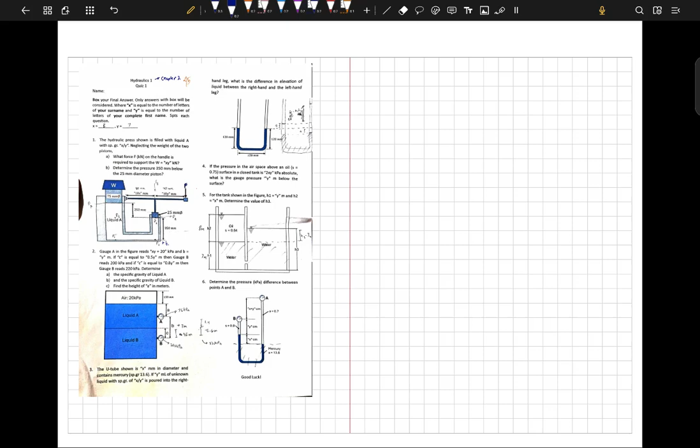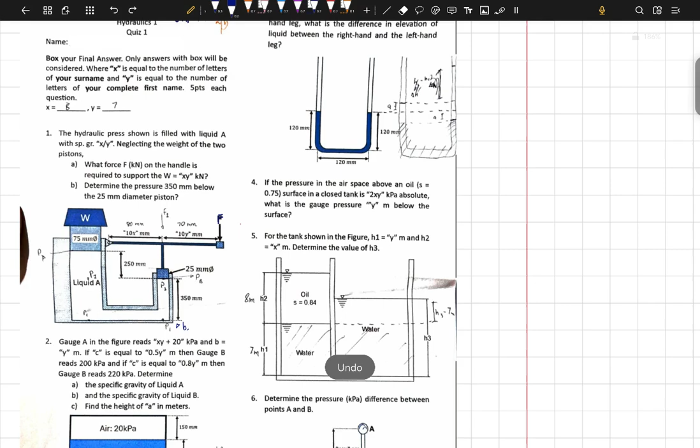Number 1. The hydraulic press shown is filled with liquid A with specific gravity of 8/7, neglecting the weight of the two pistons. What force F in kilonewtons on the handle? Ito yun, tinatanong.

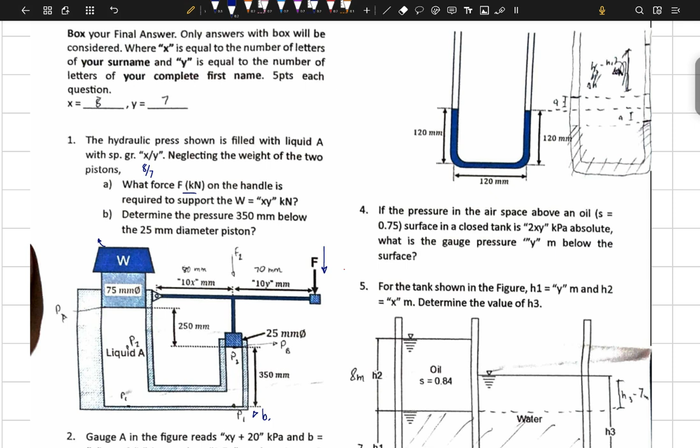Ano daw yung force na kailangan dito para ma-handle yung support na ito, which is xy kilonewton. In my case, 8 times 7, 56 kilonewtons.

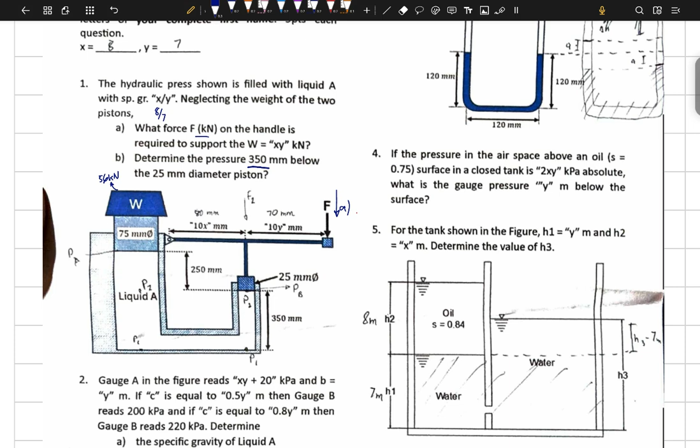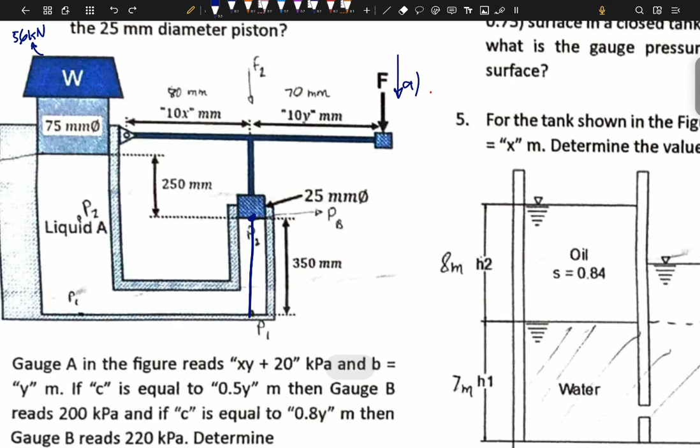Number 2, ito yung letter A. Letter B, ang hinahanap is pressure 350 mm below the 25 mm diameter piston. So ito yung 25 mm diameter piston, 350 mm below, which is ito na. So ano yung pressure dito? Sabihin natin P1. So sabihin natin F1 to.

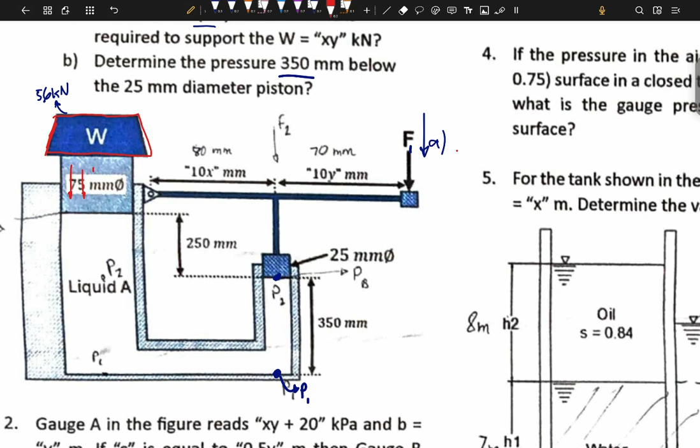So yung problem na to, analyze natin kung paano siya nag-work. Meron tayo ditong weight na tutulak dun sa tubig. Magkukos siya ng pressure, isa na yun. Yun na yung unang pressure na magkukos. And then meron pa tayo ditong liquid which is at this shape.

So ang rule sa liquid is pababa ng pababa, pataas ng pataas yung pressure. Ibig sabihin, mayroon din tayo dito na pressure difference, which is pwede na natin to i-cut like this. So same yung pressure dito sa line na to. So kapag kina natin yung sabihin natin P2 dito, ito na rin yung P2 na to.

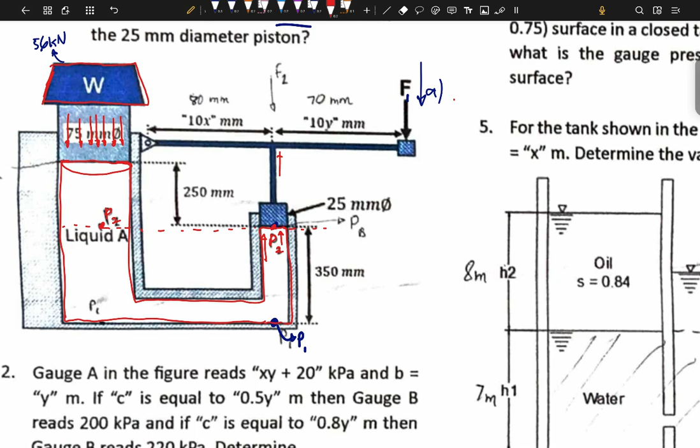So ang tendency kasi ng liquid is, since nasa taas to, mas marami siyang laman, tendency niyan is bumaba dito tapos tumaas dito para maging equal yung level niya. Ibig sabihin yung pressure na yun is magkukos ng force pataas dito, and then idagdag mo to, magkukos din siya ng force, which is dito na yun, yung force na to matatransfer ibang direction para yan.

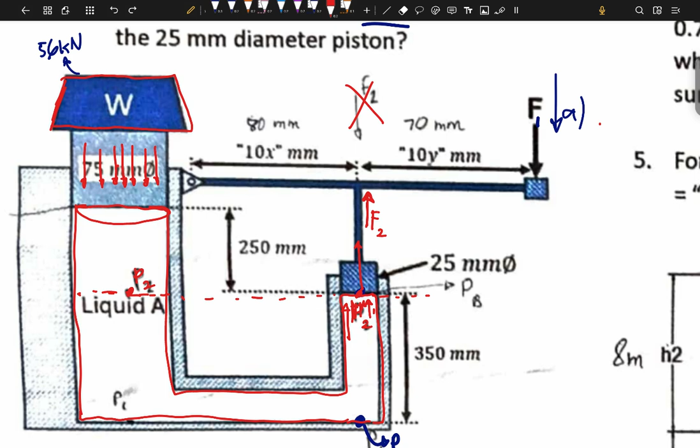So ito yung tawagin nating F2. Dahil dito sa weight na to tsaka dun sa pressure difference na to, magkakaroon ng force dito na F2 kasi itutulak ng tubig itong piston na to pataas. So solvable tong F2 na to.

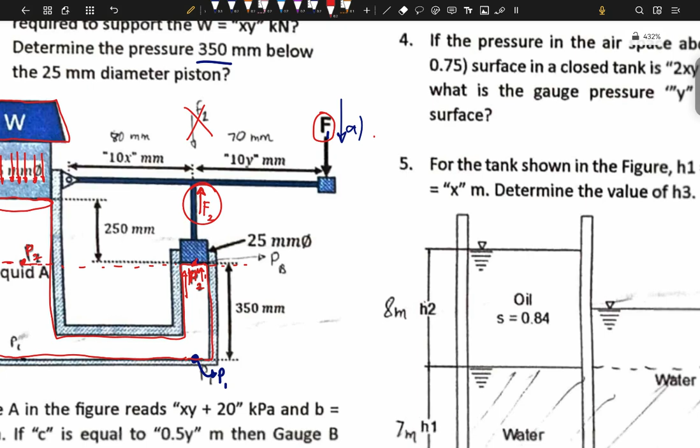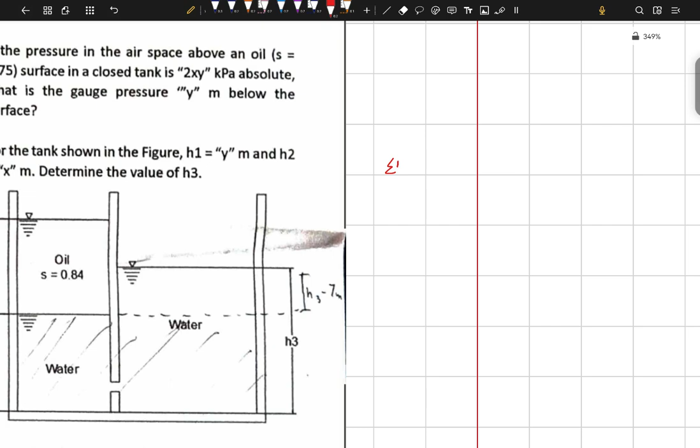After natin masolve ng F2, we can now solve for F1 gamit ang equilibrium ng moment. As you can see, nandito yung pivot, sabihin natin point O, and then we can say that summation of moment at O is equal to 0. So anong mga force natin? Itong F2 tsaka itong F1.

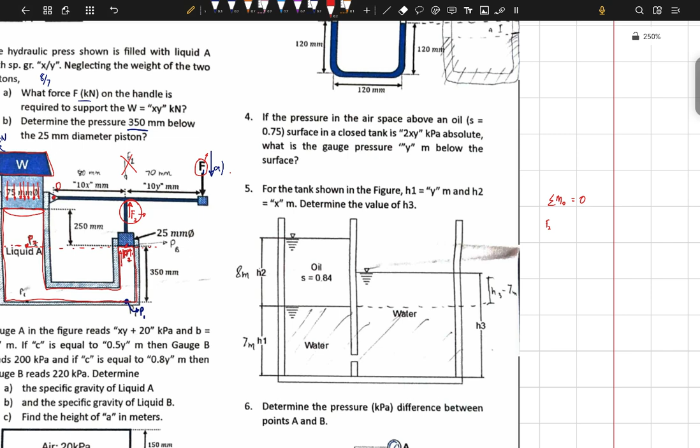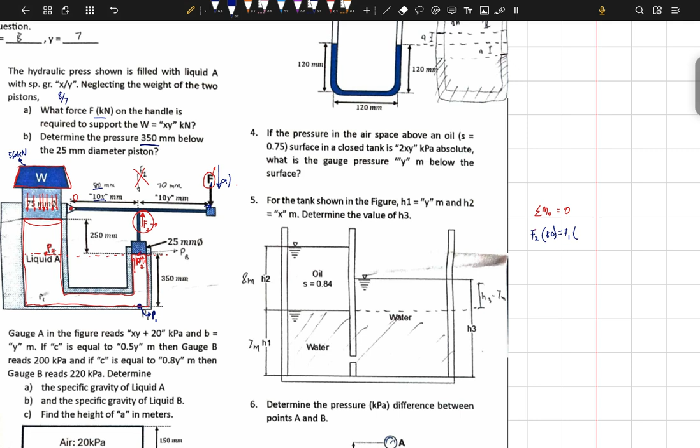So F2, palit mo tayo, F2 multiplied by, ang moment arm na is 10x. In my case, ang x is 8, so 80 mm. 80 is equal to F1 times moment arm niya is from here hanggang dito, which is 80 plus 70, magiging 150 mm. So makakancel yung mm, so no need to write.

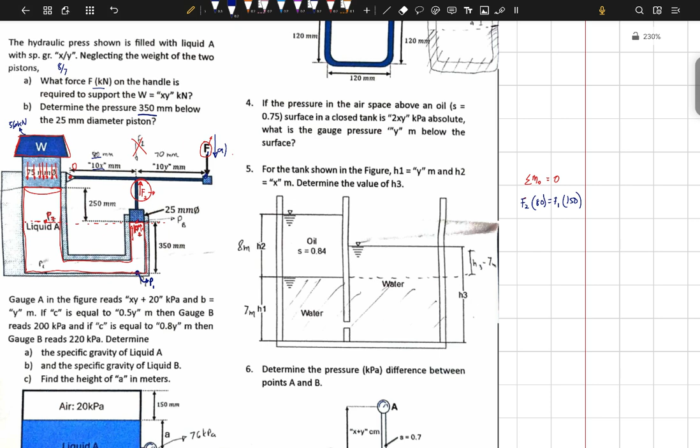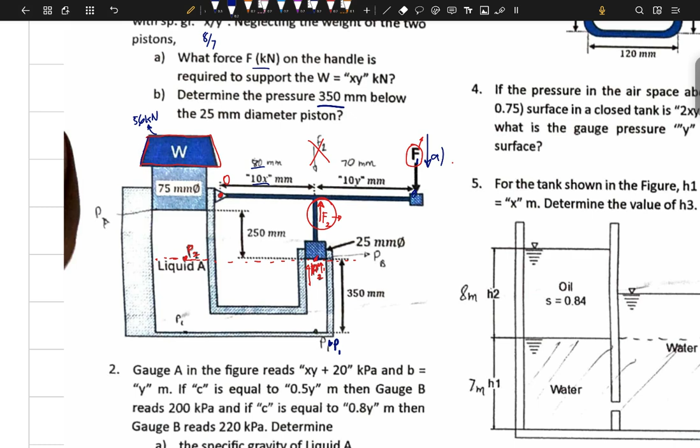So ang next step natin is kailangan natin yung F2 solve for real. Kailangan natin yung value ng F2. Ang step na nakikita ko is convert muna sa pressure itong weight na galing sa 56 kilonewtons. Para ma-convert yun, P is equal to F over A, which is 56 kilonewton divided by area nito, which is circular kasi may diameter. So pi over 4 diameter squared.

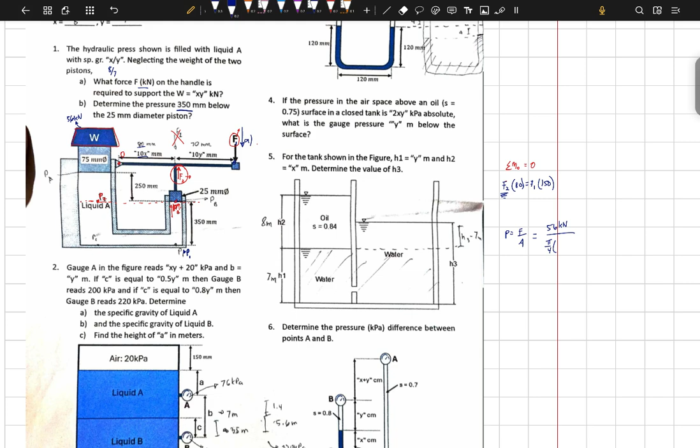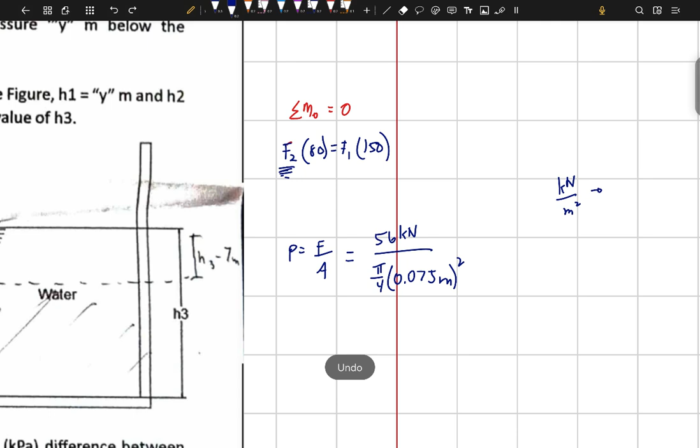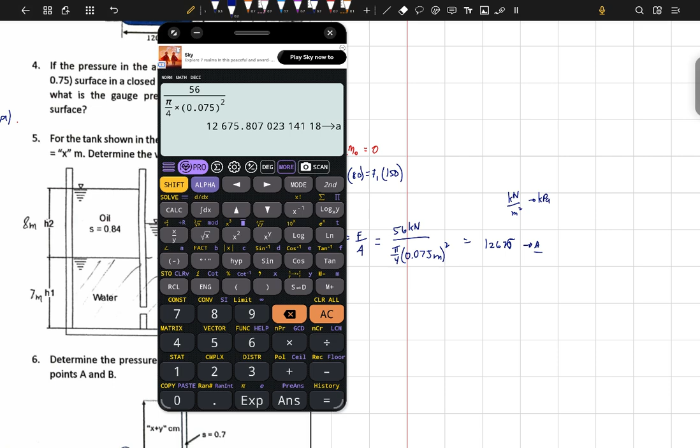Itong mm na to, convert ko na agad sa meters para ang sagot is kilonewton per square meter, which is diretso sa kilopascals. So sagot dito is 56 over pi over 4... 12675. Store natin sa A. Okay lang kahit hindi na mag-round. Sige, round natin.

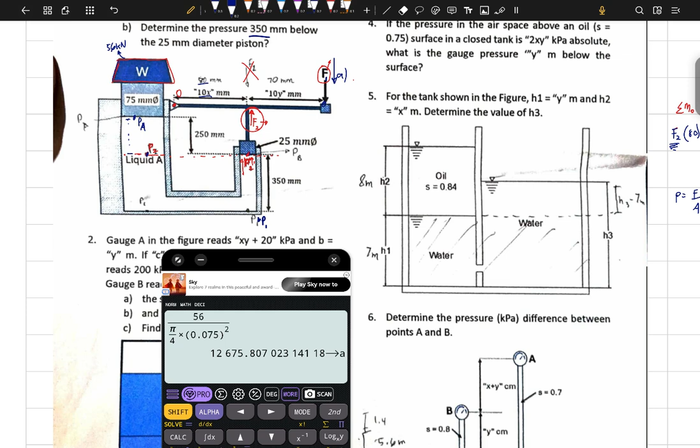Ito na yan, P1, o sabi natin PA. So para makuha yung P2, yung difference lang nito, which is P2 is equal to the initial pressure, which is PA, plus yung gamma H. So yung gamma H is, pwede natin sabihin S gamma water times height. Ang S niya is 8 over 7 gamma water. Sulat natin yung units para sure. And then height niya is 250 mm. Convert din natin sa meters.

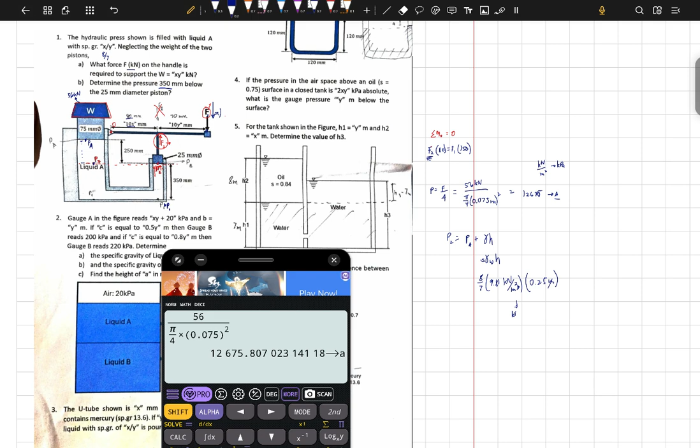Nakakancel yung meters, m squared. So kPa din yung result niya. Add natin. So A plus 8 over 7, 9.81, 0.25. Ito na yung P2... 7.9. So store natin sa B.

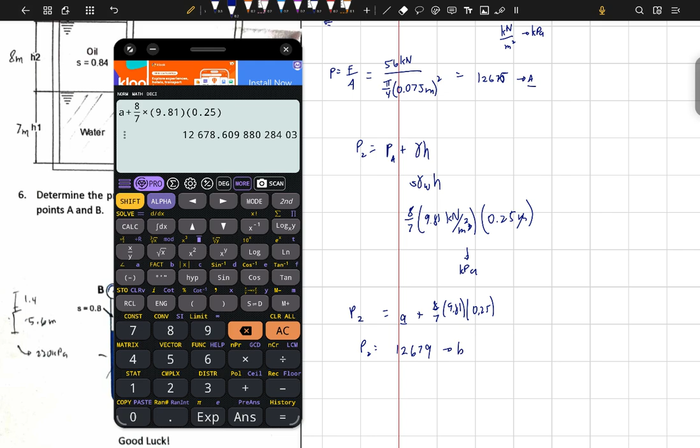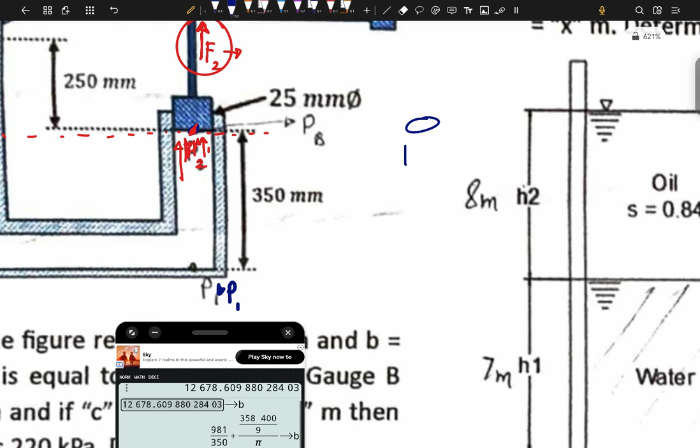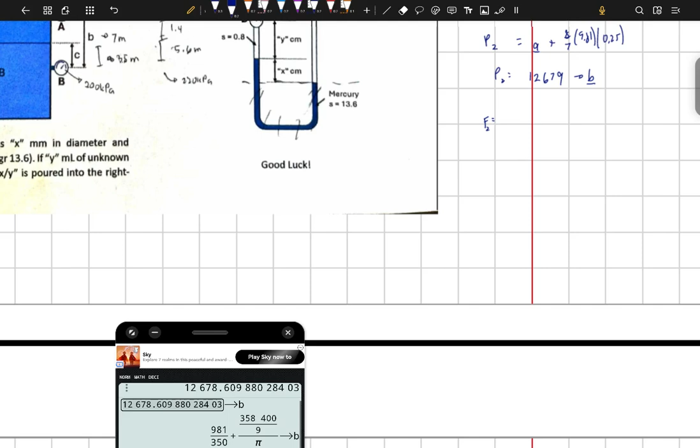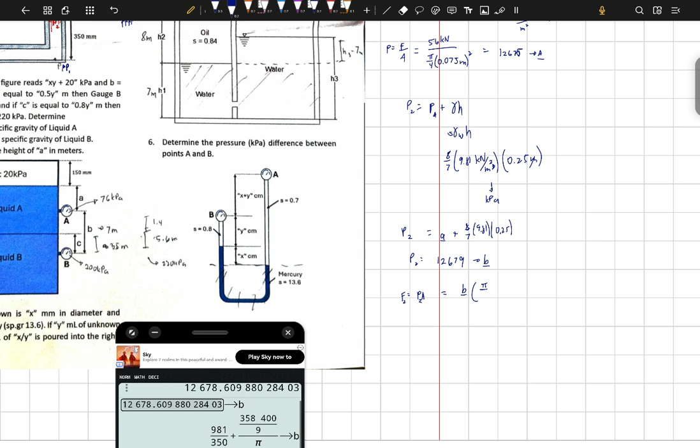So meron na tayong P2, babalik na natin siya sa force. Yung pressure na to over this area magiging force. So ang force is F2 na to, diretso. Magiging PA, which is itong P2. So yan ay yung B, add natin yung or multiply natin yung area ng 25 mm. Pi over 4. So naka-kPa to. Tapos ito dapat ay naka-m squared para makancel yung m squared. Kilonewton yung matitira. Pi over 4 times diameter squared.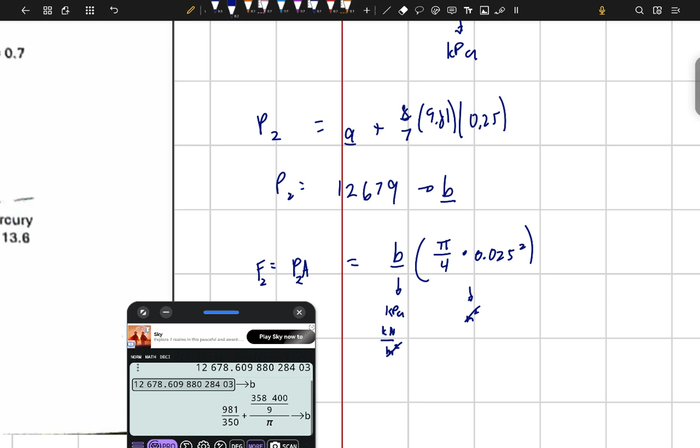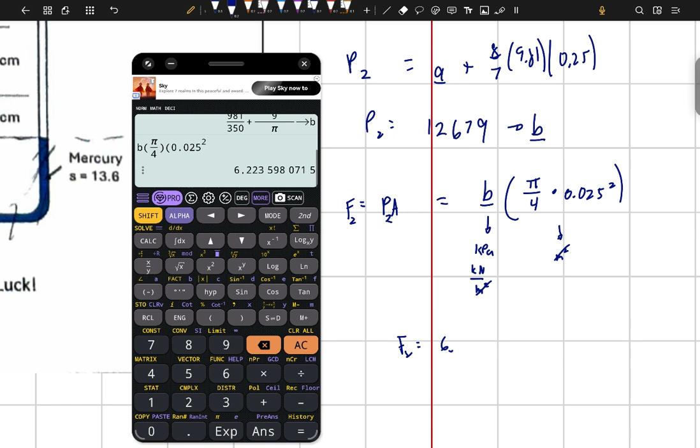Yan. Yung sagot is 6.223 or 224. So F2, store natin naman sa C.

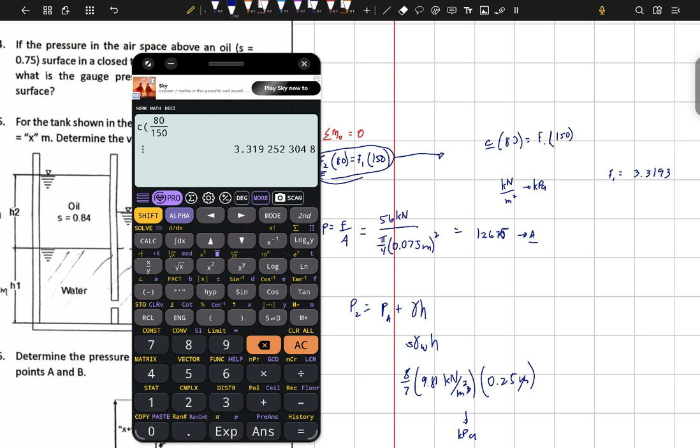So nahanap na natin yung F2. Pwede na tayong bumalik dito. So dito, C times 80 equals F1 times 150. So C 80 over 150. This is the answer: 3.3193 kilonewtons for letter A.

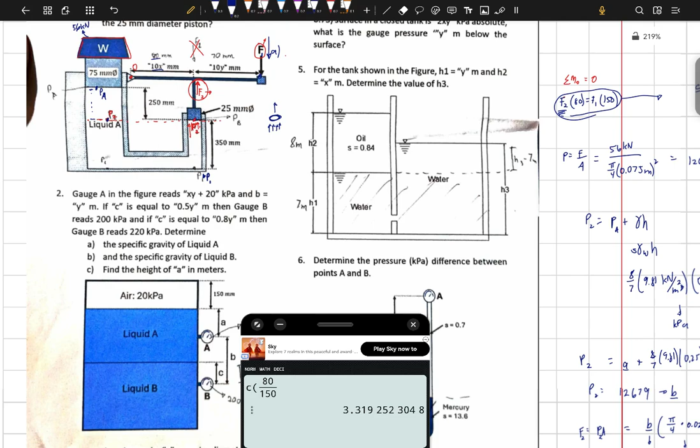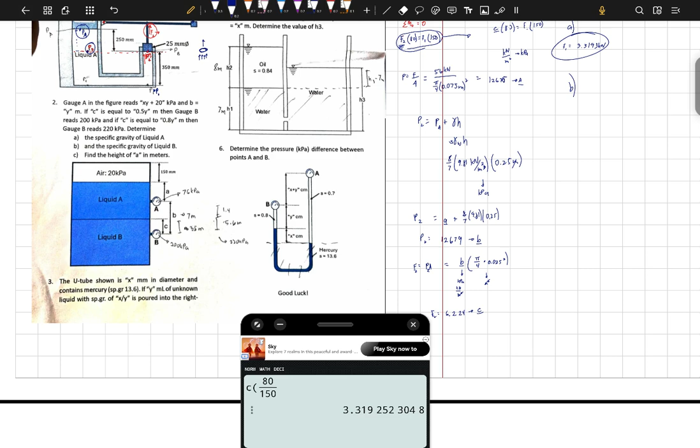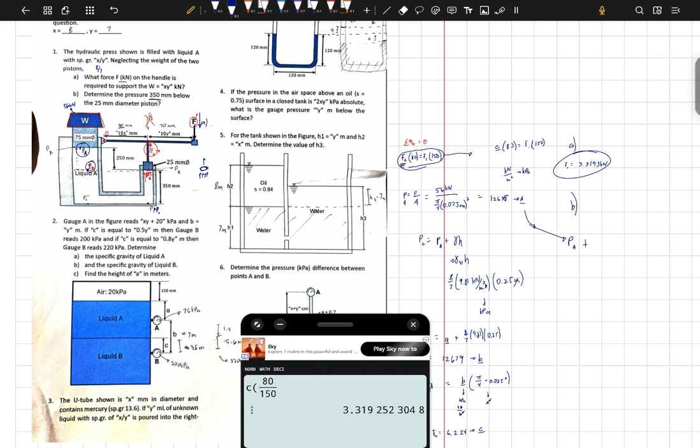And then punta tayo sa letter B. Determine the pressure 350 mm below the 25. So dalawang way yan. Pwedeng mag-start tayo dito, pwedeng mag-start dito. So ang PA natin, may value tayo ng PA, no? Nasaan na yan? PA natin is ito, no? PA yan. So pwede gamitin natin yung PA. Plus tayo ng from here to here naman yung kukunin nating pressure.

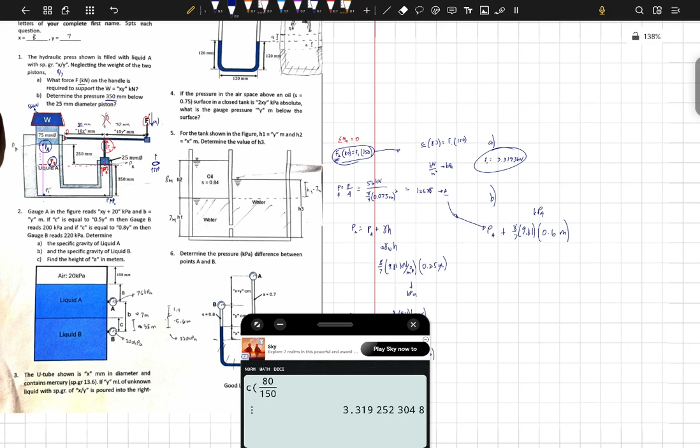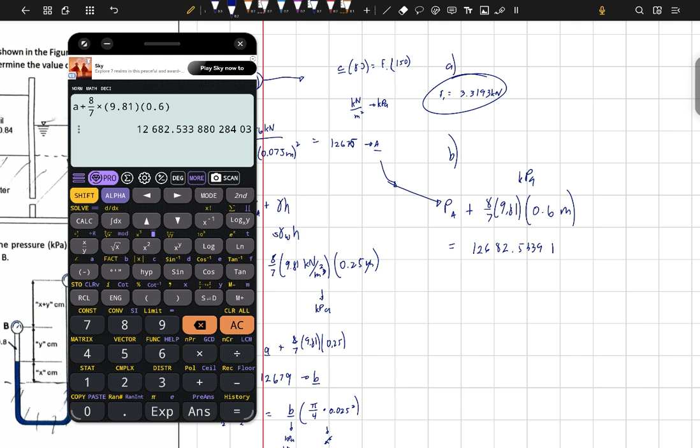So, ganun ulit. S gamma is 8 over 7, 9.81. And then, ang magiging H niya is 250 plus 350, magiging 0.6 meters. So, naka-KPA din ang result nito. Solve natin: A plus 8 over 7, 9.81, 0.6. So, the answer is 12682.5339 kPa. That's for letter B.

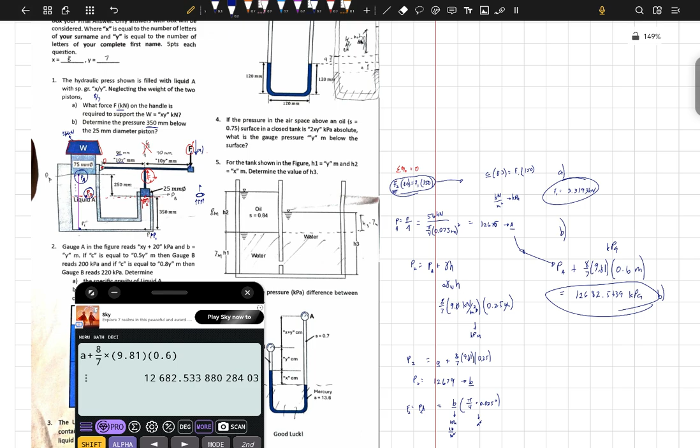So, yun guys for number 1. Number 2, next video na lang.